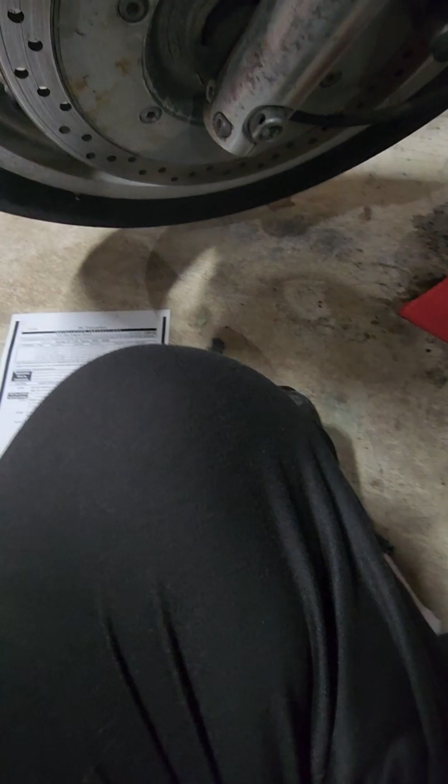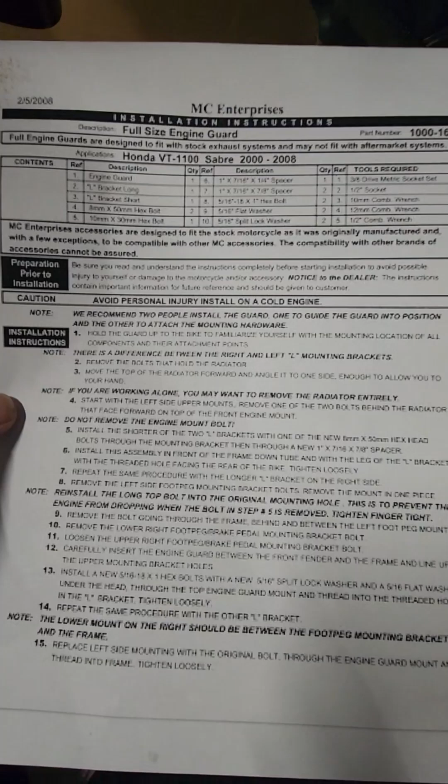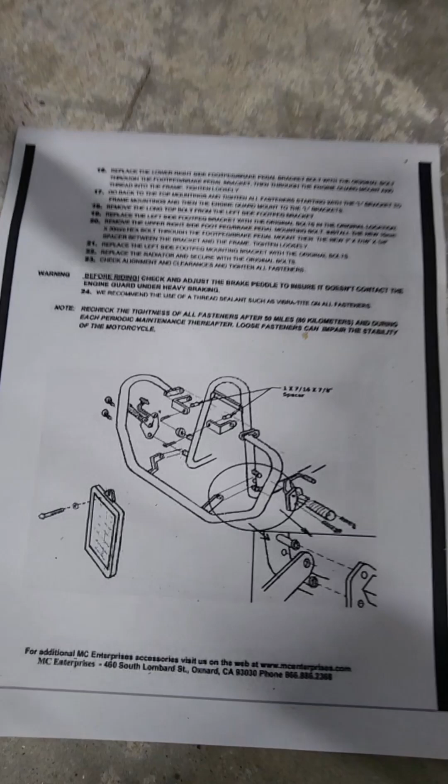I did manage to find this from MC Enterprises. It's actually for a different model, but somebody posted this on an Amazon review, which is the only way I'm getting these damn things on. So I'm just trying to pass it on. So this is for the Honda Shadow Sabres from 2000 to 2008, the VT 1100s. And this is the second sheet I got, which has a little picture diagram to kind of help out.

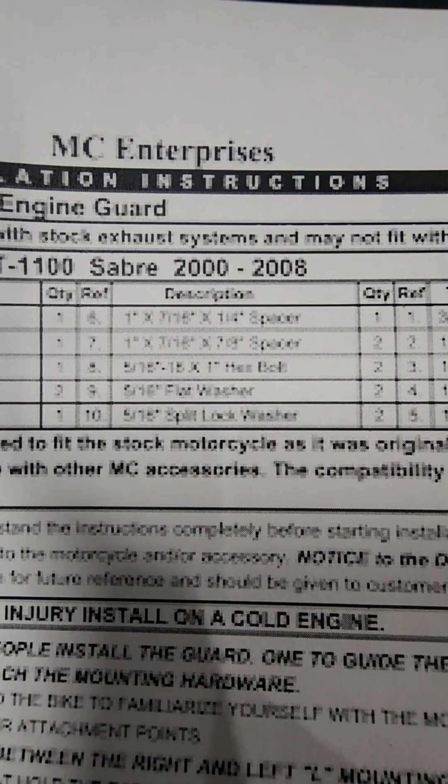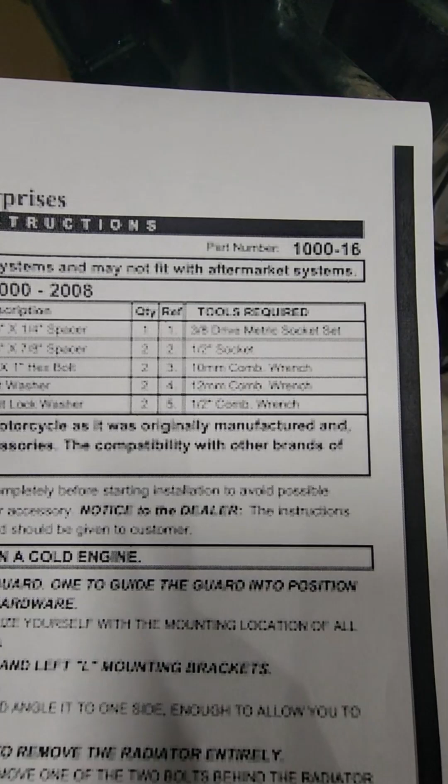Now, they actually did a great job with these instructions. They put a reference number for each one of the parts. It's really hard to see here. I pulled this off of an image from Amazon, and I tried to beef up the contrast, because believe me, the first one that I pulled up was like half the size of this page, so you couldn't even read it because of the size.

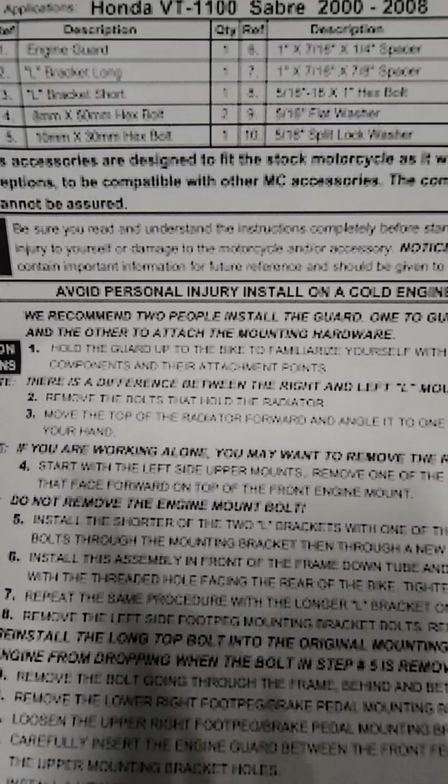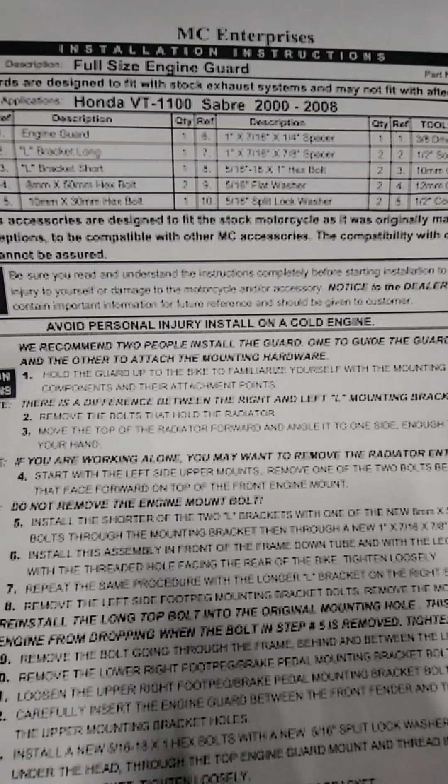And then the stuff was really light, so I went into Photoshop and bumped up the contrast and adjusted the levels to make the blacks blacker so you could try and read it. And so now it's pretty good. I'll go through and read these instructions at the end of all this, that way everybody can read that. But the big thing that gets everybody is these dang brackets. It doesn't show you where they go and how to hook them up. So let me go over that real quick.

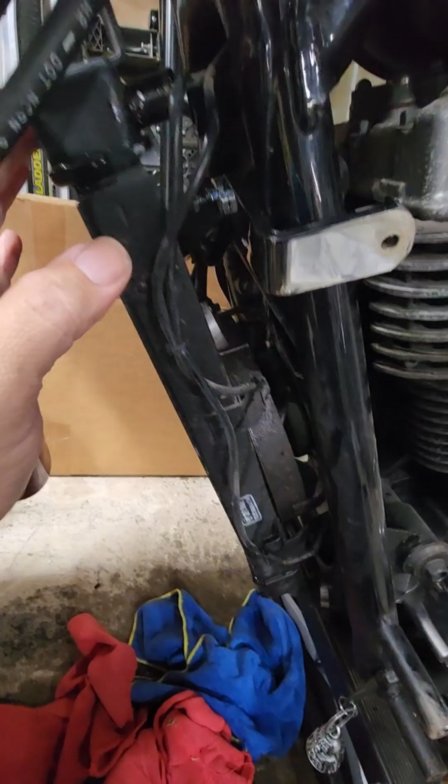So you'll have to undo the top bolt on your radiator and the bottom bolt. And then, because I'm working by myself, it says you should just completely remove it to make it easier. But I just undid the top screw for the hose to pull this off. And there's my hose clamp. I better keep that for later. But yeah, so there's two bolts here. You can see the back side where the new one's coming through. And that's where the engine mount is.

You got to get to them from this side to undo them, and they're just these tiny little bolts. So you take these ones out, and then you're supplied with these larger ones, which are about 2 inches long, I'd say. And if you look in there, you can see these really thick spacers. They're about 1 inch thick. You got to put those spacers.

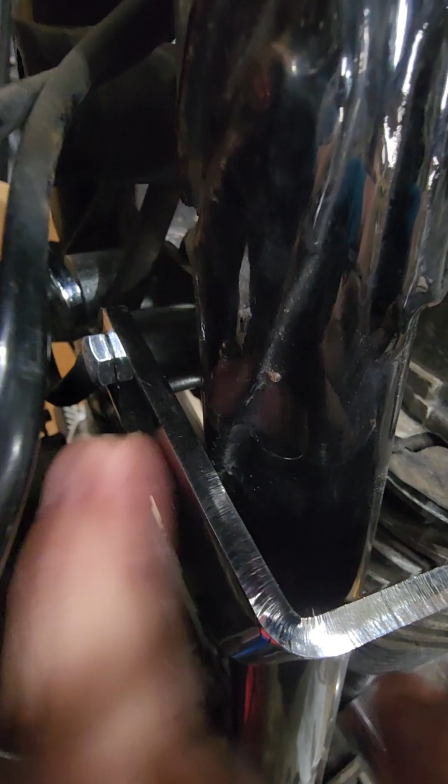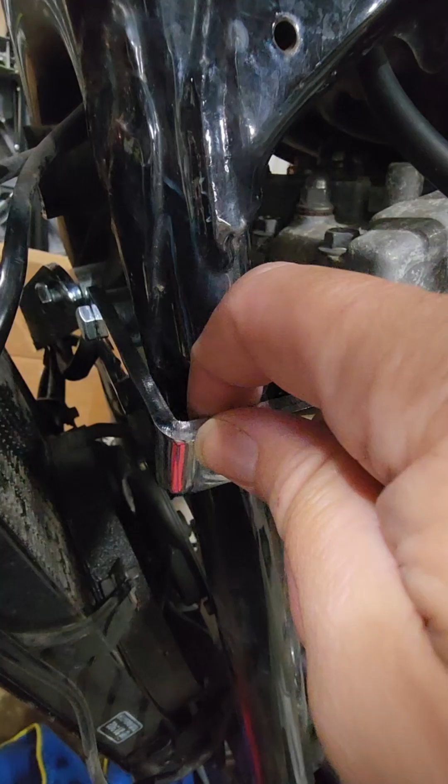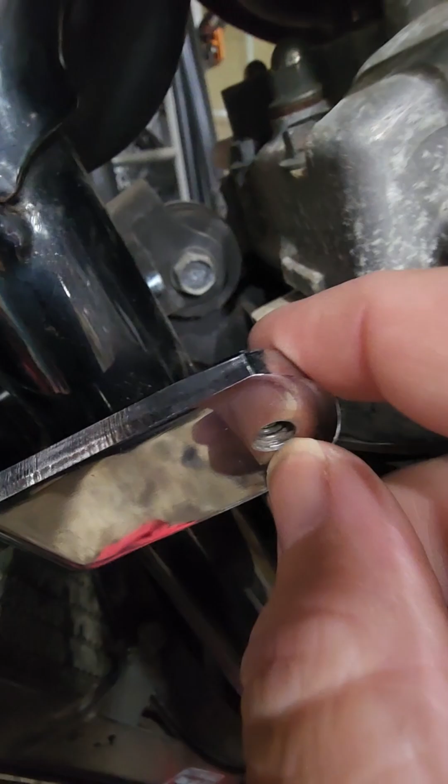So you got the bolt, and then you got the bracket, and these are two different sizes. There's a short one and a long one. Short one goes on the left hand side as you're sitting on the bike. So short one on the left hand side, long one over on the right hand side. And there's a threaded side right here, and then this other side is a bigger hole than what this one is.

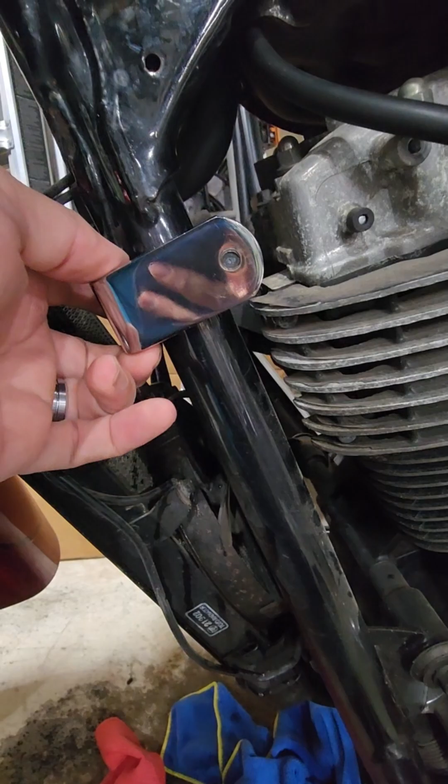So you put the threaded side facing towards the back of the motorcycle, and then the bigger hole, you put this bolt through it, and then you put that big 1 inch thick washer in it, and then you put those in, and you'll tighten them up. So this is the biggest issue I found when I was trying to get it matched up, but I will walk through each of the steps.

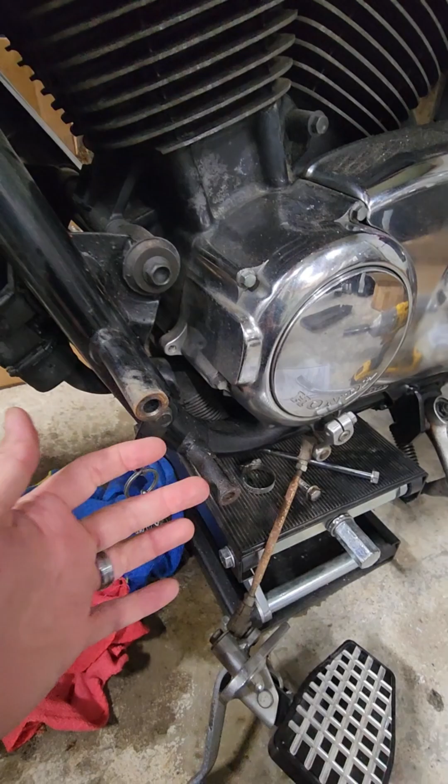I've already got my floorboard, or my steps, removed. This is not the factory floorboard. That's actually a Rebel one that I've modified to fit on there. But I'll go through mounting it here as well. It actually goes into this bolt on this side. But yeah, you're gonna want to lay some stuff out, because you will leak some radiator fluid. All right, let's get back to it.

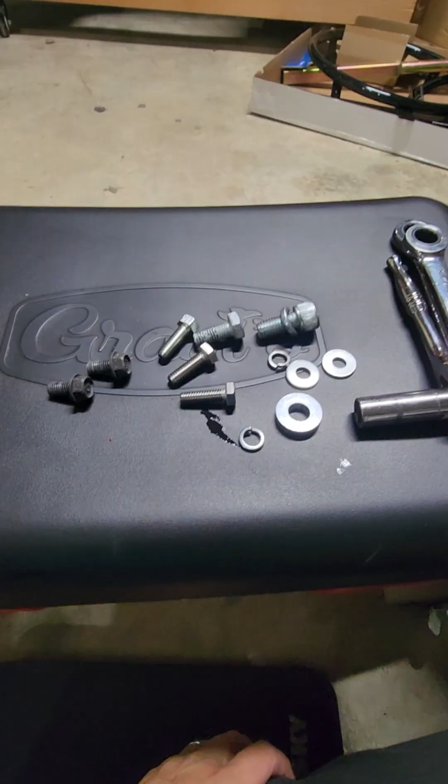All right, I did want to touch on one thing real quick. So these are the factory bolts that came out, but the ones that replaced it that come in the kit are like 2 inches long. So imagine these two as 2 inches long. These are the bolts that you get in your kit.

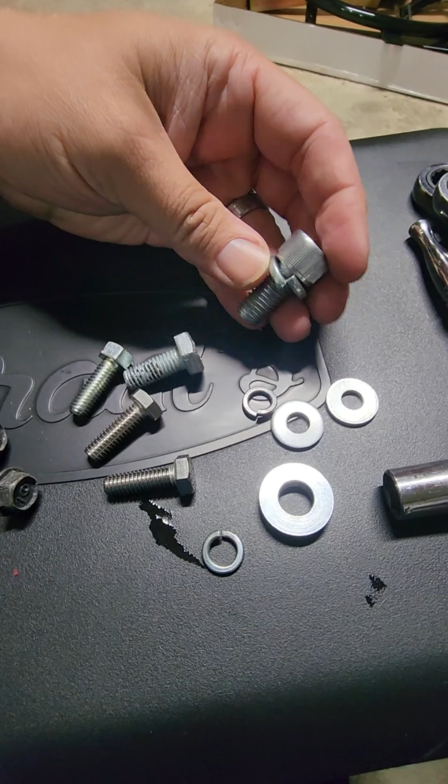This is the large bolt that holds the two pieces of the crash bar together. It comes attached to one of the crash bars when it first comes shipped to you. The rest of these are all loose. There is a thicker bolt here, which I have not gotten to where that one goes yet. There's two small, same size washers.

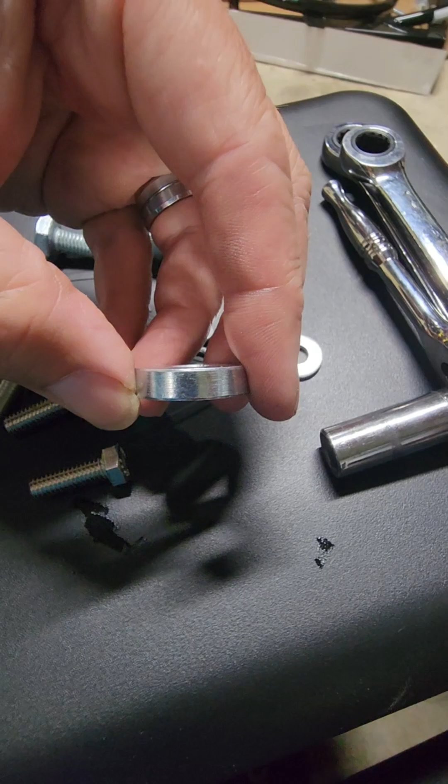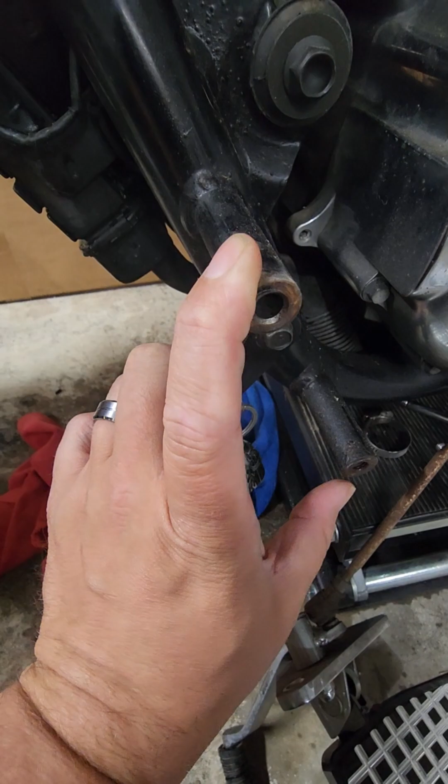There's two lock washers. And then this is a spacer. This is actually going to go in, I believe, on the passenger side because it goes onto your floorboard. Oop. I think it's actually on the driver's side, or on the right hand side. On the right hand side, I believe the crash bar connects into one of these, and then your spacer is going to go into the other spot.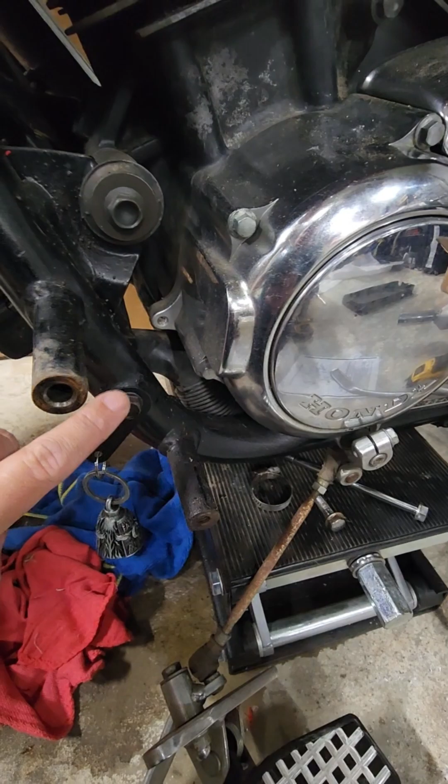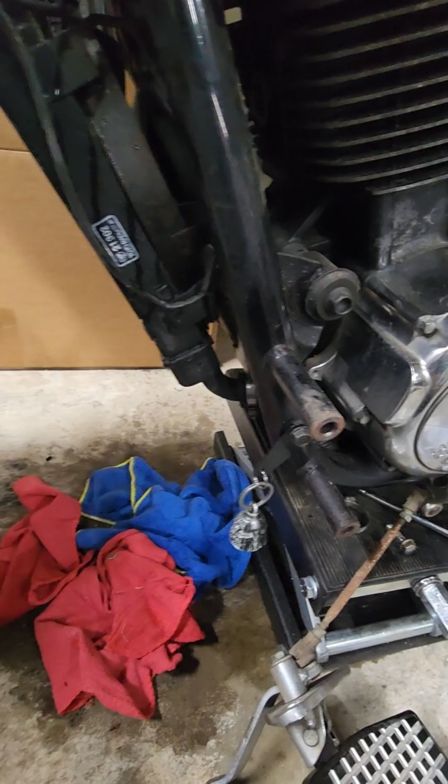On this side, which is the left hand side, crash bar is going to go into that bolt. It won't actually touch this. This was taken off because I was trying to figure out how the heck these things went together until I finally figured this one out. So now that that's all settled, let's move on. I just wanted to say that before I went and put all these bolts in, and then you guys didn't get to see what they are.

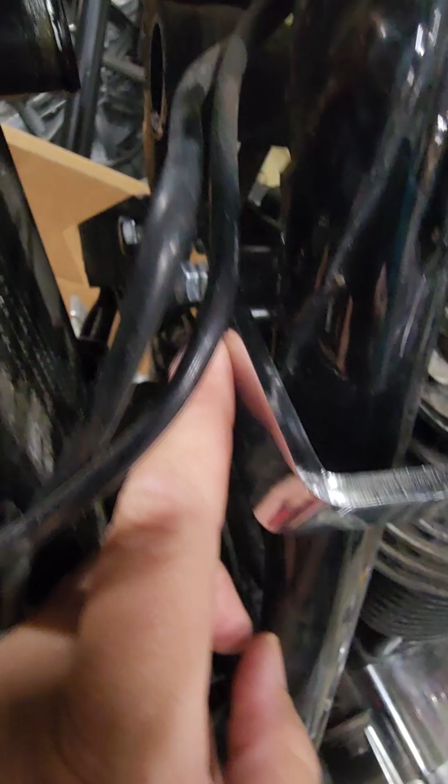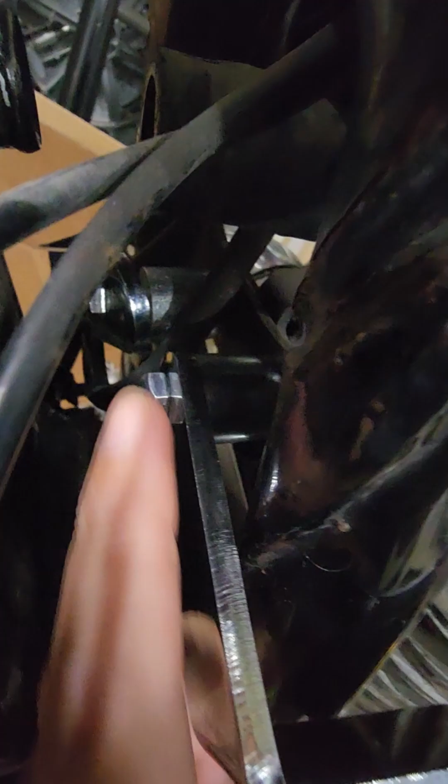I also forgot to mention there's two larger spacers that are like 2.5 times the thickness of this. That's the ones that go in right here on the back side of the radiator mount. So you can see them. You can see those two. This guy right here, and then the other one back there. And then those are the longer bolts I talked about. You'll take the short ones out right here, and then you'll drop these longer ones in with your brackets. Short one on the left hand side and the long one on the right hand side, with the threaded piece or the threaded hole facing back towards the motor.

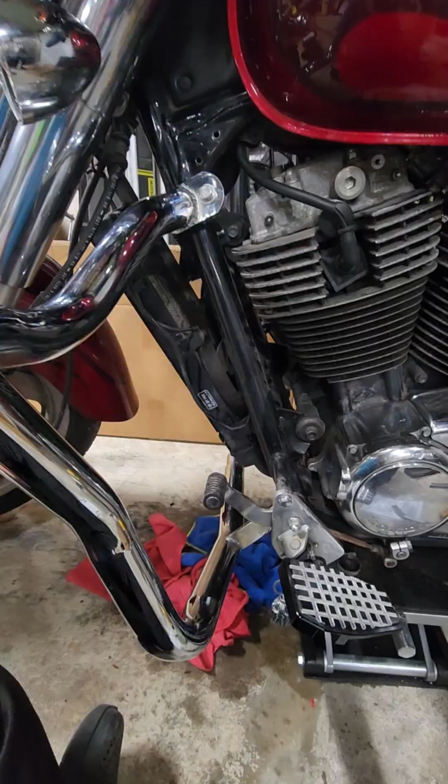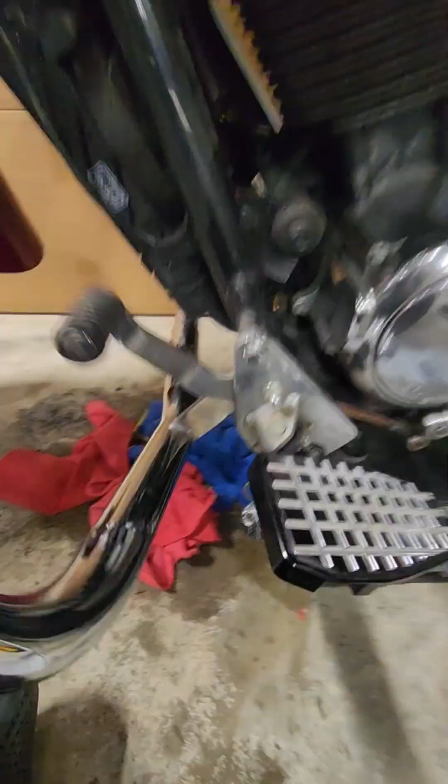Okay, here's the left side completely put on. I ran the short bolts that come with it through here. I put the lock washer, then the washer, and then the fitting goes on there. And this is a threaded in one, so it just threads right into that other bracket. So I waited till I snugged this one up first, and then I tightened up this one here, and then I tightened up the one down here.

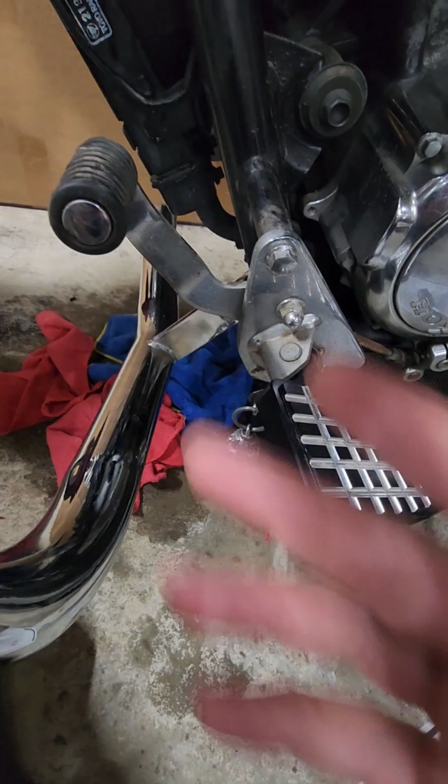You do not need to take this off if you don't want to, but when I took it off, it allowed me to go straight at the bolt instead of having to use a box wrench. But you can get a box wrench in there if you really wanted to. I took these two bolts off, this top one and that bottom one, and this whole linkage just came off. It was a lot easier to get to, and it only takes a second. If you do take this off, this is a long bolt. It runs through here. Oh, no, that's not the trouble one. When you take this one off, this is all, oh shoot.

Forget what I said. You do have to take this off because this is a long bolt as well. So take this one out, take that one out, pull the floorboard out, or your shifter and everything out, and then you'll have to take this one out. This one runs all the way through into that rod, and when you take it out, this little spot back here is going to want to push out that way just a little bit, so when you go to thread it back in, you may have a little difficult time.

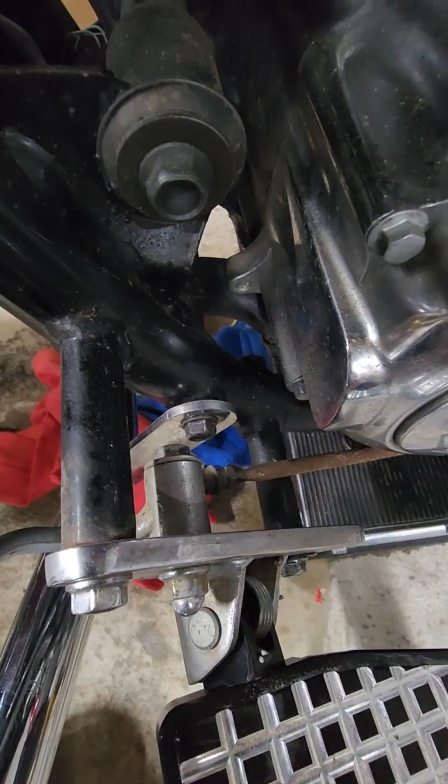What I did is I just grabbed something I can use as a pry bar, and I went up against that little notch where the screw hole is, and then pushed it against that metal, and then I just gave it a little bit of a push while I was threading in the bolt and pushing the bar backwards a little bit, which allowed it to push this part inward, and that lined up the bolt hole for me. It only goes off just a little bit, but if you have trouble getting it to thread back in, that's most likely what it is. So I hope that helps. Let's move on to the other side now.

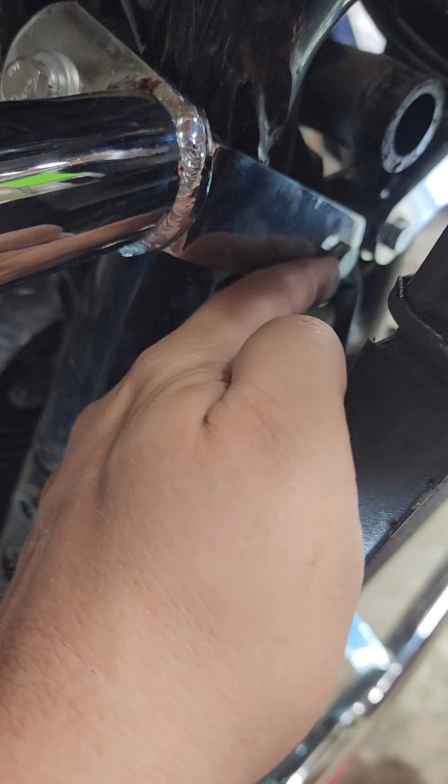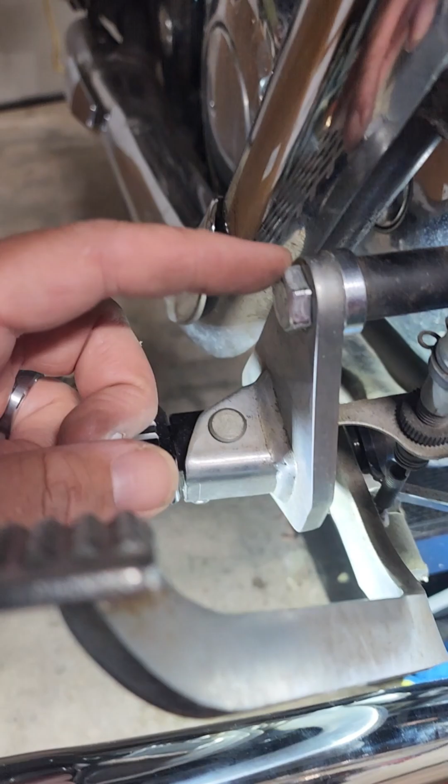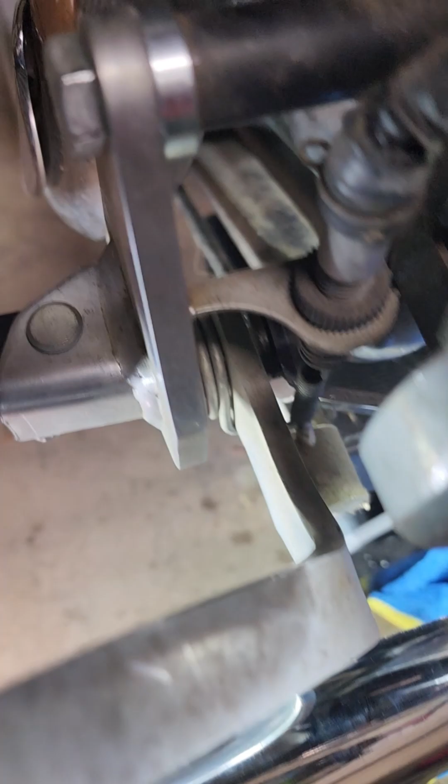Alright, so for the right side, I had this bracket loosely mounted. This wasn't tight yet, and I got this one lined up in here. I dropped the bar in here. You have to take this bolt off, and there's one down below right there. Let me get focused in. So that one down there, and then this top one, both have to come out, and this whole assembly is going to come outward. So this bar from the frame, or from the crash bar, is actually going to go, and where's a good way to see it?

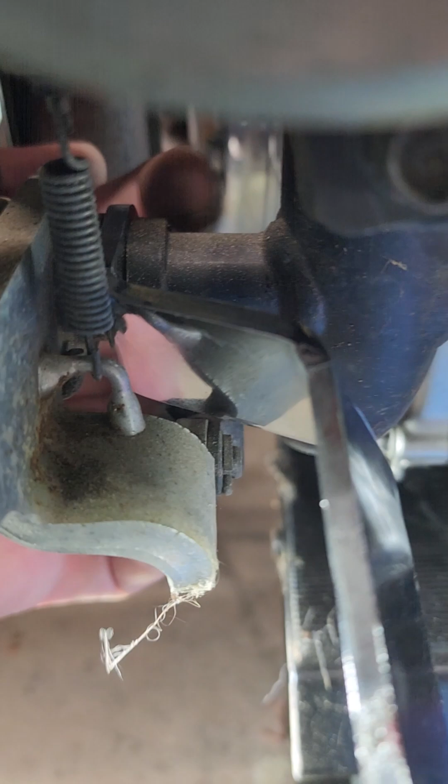Okay, I guess that's the best way. This is like a little nub. I think that's just forged metal, yeah, forged steel. The way that is, it kind of looks like a grommet, but it's not. This engine guard is going to go flush up against that.

So, if you can see there, this is the engine guard. That's the frame, and then after that, you're going to have all the equipment that was on it before, which is just like a bushing, and all this assembly stayed together, so I didn't have to worry about putting it all back in. I left the bolt somewhat in it so that it didn't drop everything out, and that helped out a lot. So you get that bar up in there.

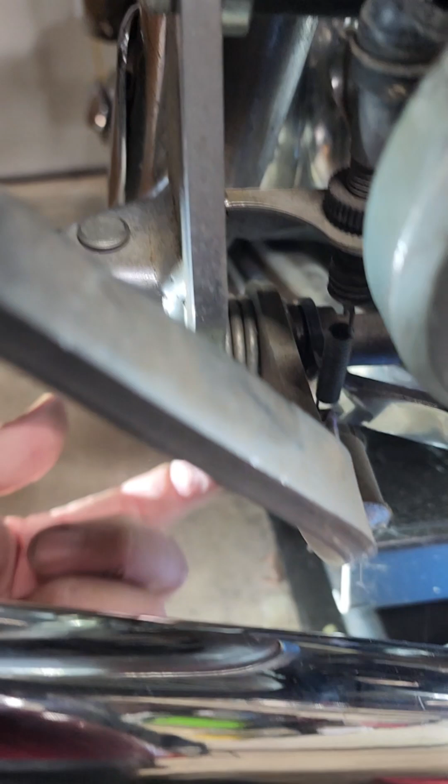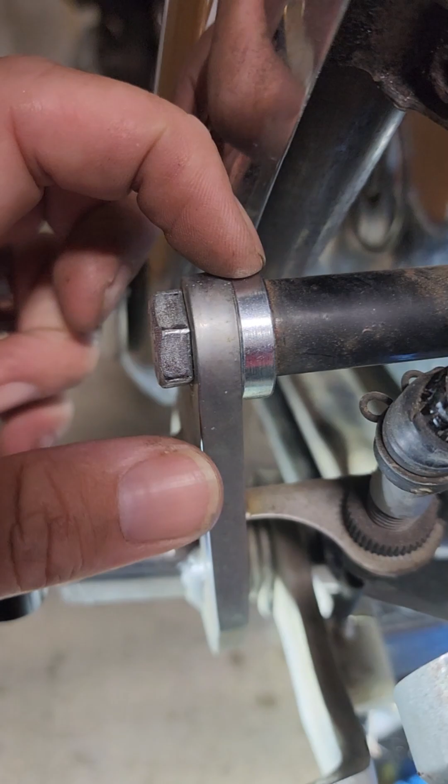Once you get that in there and you have this twisted in, then you can come up here, and this should be lined up pretty well, but just put the bracket up to where you can see the hole. Once again, lock washer, flat washer, and then it goes into the threaded part on the back. So get that in the bottom part. This is that medium-sized washer that's in the pack. This is going in here to compensate for the extra thickness you got right there.

This bolt right here is the new bolt that came with the kit. It's the big thick one that's all by itself. There's no paired nut or bolt with it. So you'll be swapping out the factory one for this bolt that came in the kit. It's a 17 millimeter size head, and what I did is I lined up the bottom one first, got it in. Once I got it started on the threads, I got the top one lined up, and then tighten up the bottom one, then tighten up the top one, and it's all on nice and tight.

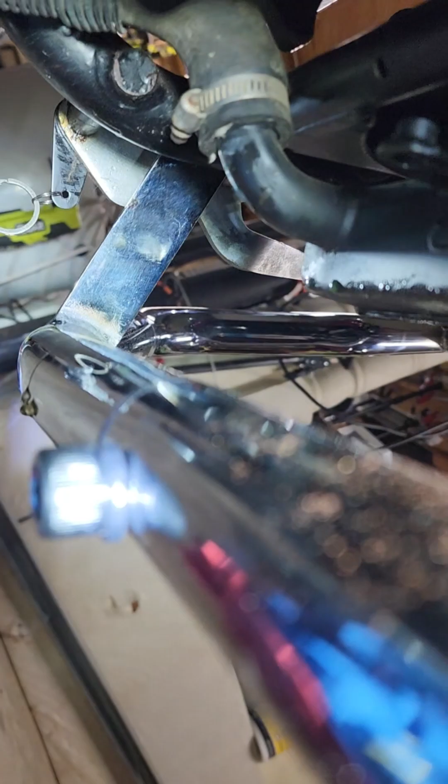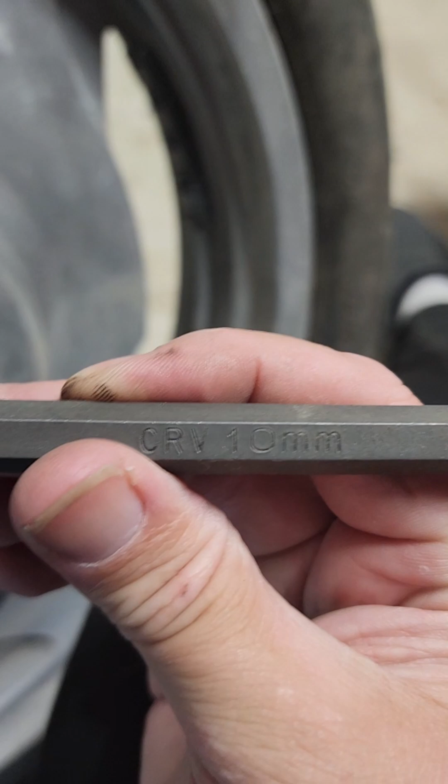Then down below you have, let's flip this up. So down here, this is a big Allen key, and that one is a 10 millimeter. So you need a 10 millimeter Allen key, a 17 millimeter socket for this one, 14 millimeter socket for this one, half-inch socket for these ones. These ones are 10 mil or 12 millimeter bolts.

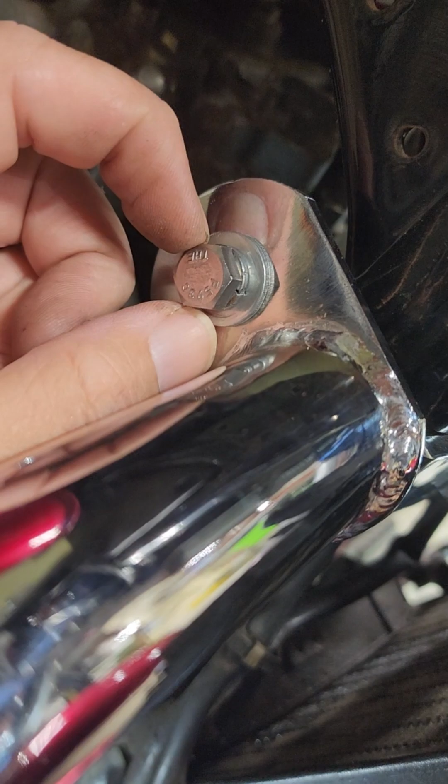I accidentally stripped out one of mine because I originally thought they needed to go up in here. You can see I actually tapped that. That's when I was trying to figure them out. But I went down to the hardware store and got this one to replace it. This is a, what is it? 3/8 16 thread count by 1 inch, I believe.

But the only reason my bike is on a lift right now is because I was going to make a video tutorial tonight about changing the front tire, and then I was going to put these crash bars on while I was at it, and I had something else I was going to put on. I forget what.

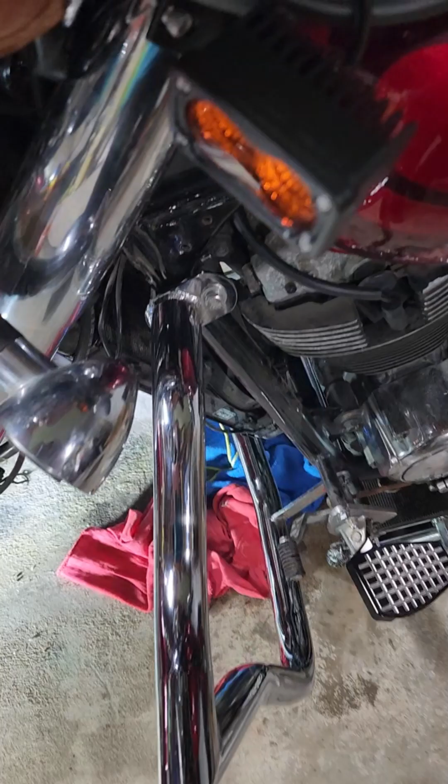Let's see here. So if you do accidentally do like I did and strip it out, this is what I got: a 5/16 18 thread per inch by 1 inch, so it was 1 inch long, and that's to replace this. And I got stainless steel so it didn't rust out or corrode. So it's all finished now.

Don't mind this. This is one of those seatbelt cover things my wife just gave me.

But yeah, so that's how it looks on there. Let's see if I can get a decent front view. Ignore all the junk, but man, that looks nice. To me, I got this because it kind of looks like a cat head, and I rescue cats. That's not my full-time job, it's just a volunteer thing I do. But I absolutely love it. I think it looks like a cat head, which is suiting me perfectly.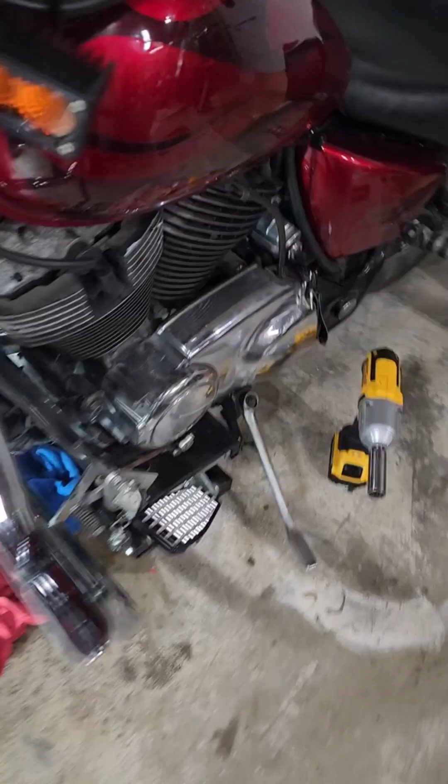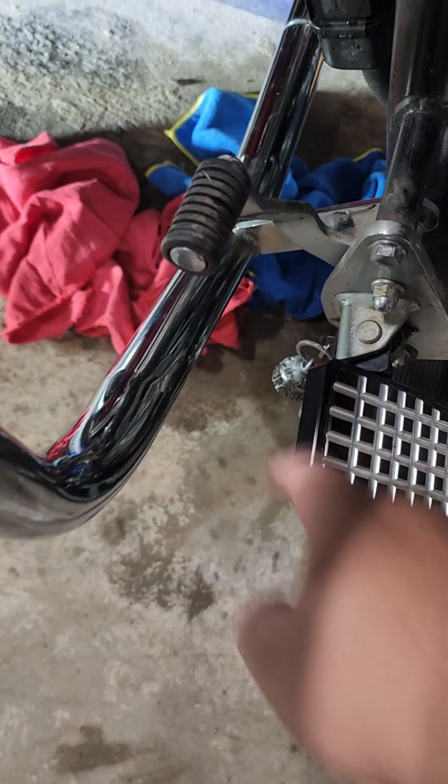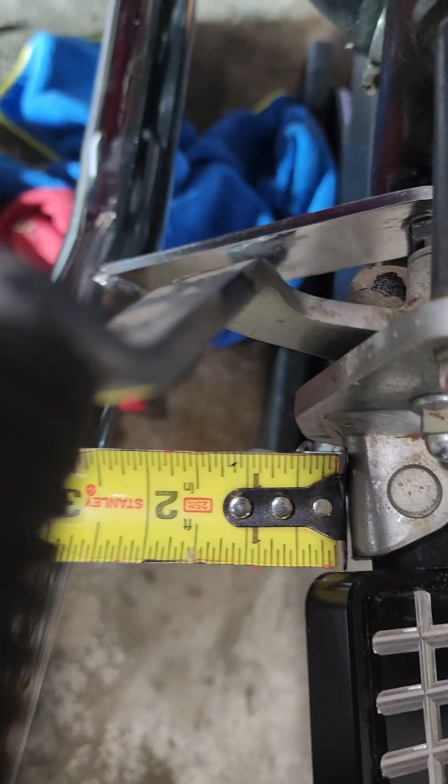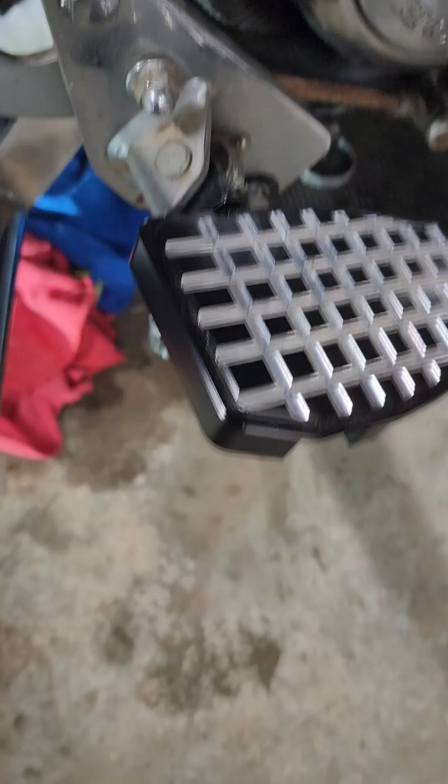As you can see, you do got some clearance here. If you get those really big floorboards, you may have an issue with that. I'll measure from here to there and see what we come out at. Alright, so it looks like we're coming out just shy, about 2 7/8 inches from the bar. It might be at 3. It's a tough call. Looking at it from here, it looks like we're at 3, but I would play it safe and say 2 3/4. At least a safe distance if you're doing floorboards. So you got about 2 3/4 inches from that peg outward.

These are little Rebel ones that I put on. I seen them on Amazon. Thought they were cool. If you see on the inside there, I shaved off the straight parts on it, and it works. And I did that so that it would kick up. Otherwise, it was just stuck there, and I didn't like that idea.

So I hope this helps everyone else out, man. It was a pain in the ass for me to find instructions on this, and I could not find anything online. So I'm hoping this helps everybody else out.